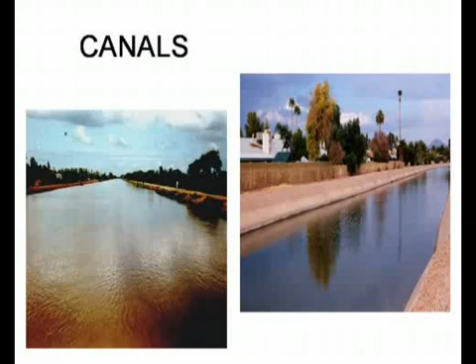The canals are nothing but man-made channels which carry the water which is diverted from the natural rivers. It means we use river water and transfer this water to other areas where there is no natural flow of water. Before diverting this water from rivers, we need to store this water, and this water is stored in the form of dams, weirs, barrages, and they are called diversion structures.

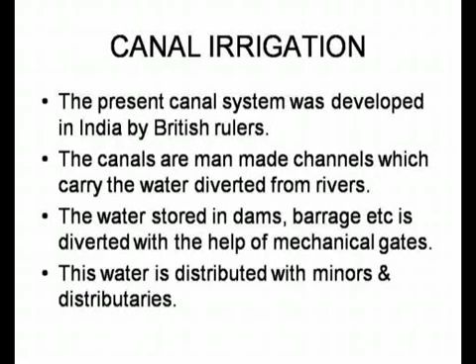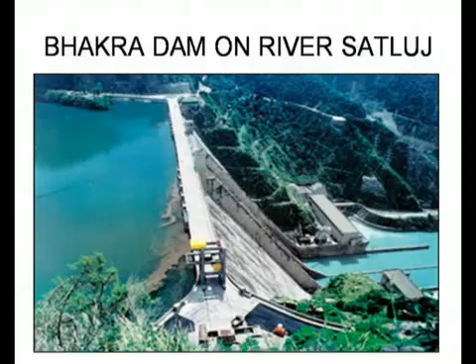And there are mechanical gates which can regulate the flow of water in the canal. They can increase or decrease the flow of water depending on requirement, depending on season, depending on cropping pattern. The water is further distributed from a canal by minors and distributaries, and the control of this water is with the local government, which decides how much water is to be distributed to which area. Therefore, canal water is a centralized form of irrigation which is controlled by government.

The canal water has certain advantages. The first advantage is quality of water. The water in canals is coming from rivers, and rivers take their water from the melting ice in Himalayan areas, or they take water from the catchment area or from big lakes, etc. And the water is sweet water, non-polluted water, and best for agriculture or human consumption.

The canals have transformed the agriculture economy of northern India, western India, and other parts where canals were built by the British and later on by government. We all know that the Indira Gandhi Canal, which is passing through Rajasthan, has transformed the life of people of Rajasthan, and it is the lifeline of millions of people living there.

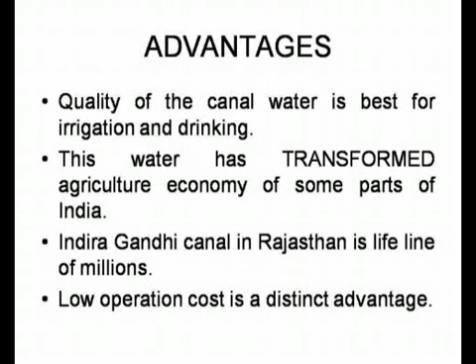The low cost of operation is the distinct advantage of the canal system in India, because water flows by gravity and it does not require any form of energy for distribution of water. The diversion structures like dams can be used for generating electricity. They produce clean power without any pollution.

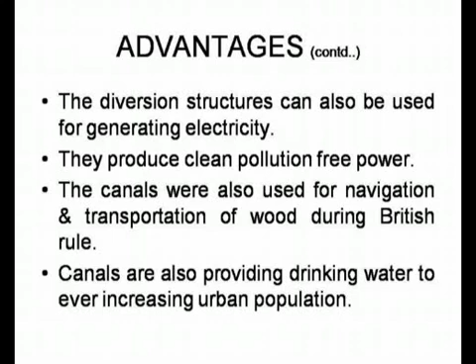The canals were also used for transportation of wood and navigation during the British period, but slowly after development of the road sector, this was not popularized and slowly stopped. The canals are also providing drinking water to the cities and urban population nowadays.

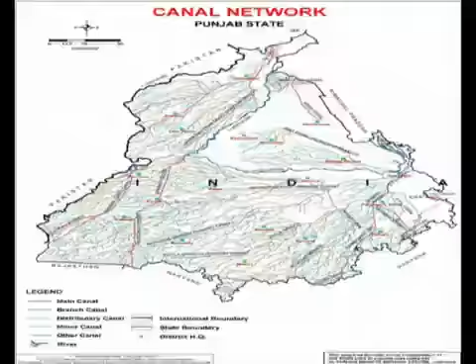Canal irrigation was very popular at some point of time, but it is declining due to various reasons, and we will discuss the problems with canal irrigation. The construction of diversion structures and canals requires a huge amount of land, and it causes ecological and social concerns. Because of land, a lot of persons are displaced at the time of construction of dams or weirs or barrages, and their resettlement is a very big problem.

Huge investment is required initially, and the income is generated in years to come. The dams constructed in earthquake prone zones like the Himalayan area put a question on their safety, because safety is a big concern during an earthquake or any other natural calamity. The Himalayan region is a very sensitive area for earthquakes; it is in zone 5 as far as earthquakes are concerned. So their safety is a concern for government and the people living downstream.

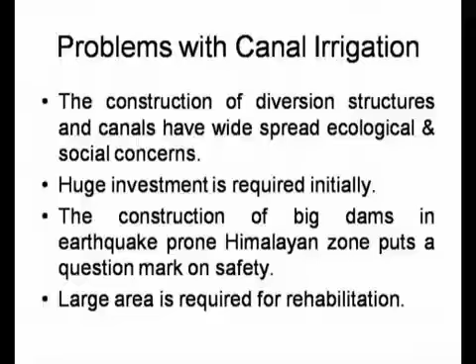Another area which is very important is land required for rehabilitation. When we construct big dams or other hydroelectric projects or water retaining projects, we displace a lot of people, and they have to be rehabilitated, and for that purpose we require more and more land.

Now, whenever there is excess rain in the catchment of rivers, there is a danger of flood, and the life of the people living downstream of the river is always in danger. Due to a lot of siltation in beds of rivers and also reduction in life of the reservoirs, flash floods are caused even with small rains, and this problem is increasing day by day.

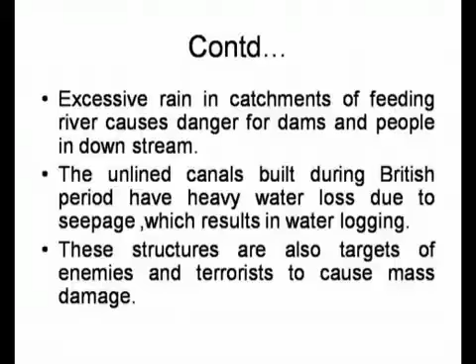The canals built during the British period were unlined canals, and they are causing a lot of seepage of water in the areas adjacent to the canals, and a lot of water is wasted through these unlined canals, which is causing waterlogging. Structures like dams are always a target of enemies, so that they can cause mass destruction, and now they are targets of terrorists. So we have to incur a lot of expenses for security of these structures.

Canals are also reducing the quantity of water in the natural flowing rivers, thereby reducing the speed of the water flowing in the river, and the siltation increases, the depth of the river decreases, and the pollution increases. The effluents are not diluted due to less quantity of water, and aquatic life is also disturbed.

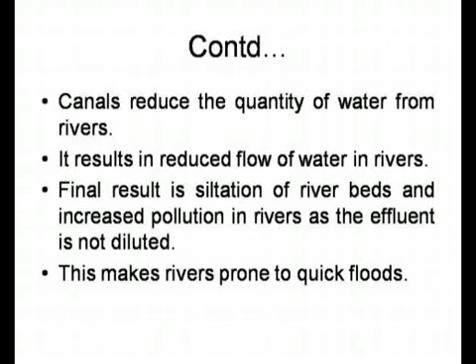The less depth of the rivers makes it prone to floods. Now we have to look forward. What should be our strategy in case of canals?

Despite several disadvantages which we have discussed earlier, there is no substitute at present for canals in the areas where groundwater is not available or groundwater is not fit for agriculture or human consumption. Like Rajasthan, like some parts of Haryana, we have to use canal water, and there is no alternative. So we have to make some strategy for proper use of canal water.

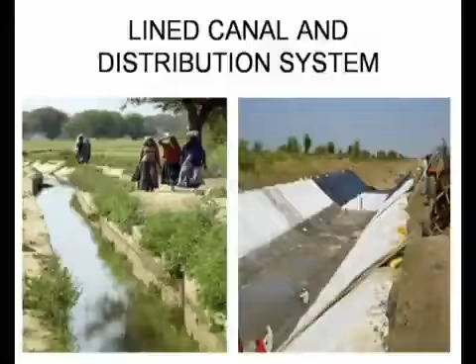First thing is maintenance of these diversion structures and canals has to be taken on war footing. The seepage from these areas, the leakage from the canals, all other problems have to be addressed by proper maintenance of these structures. Another thing is lining of the canal. Wherever canals are there, they have been constructed during the British period. Now we have to at least provide lining to them so that there is no loss of water from the unlined canal.

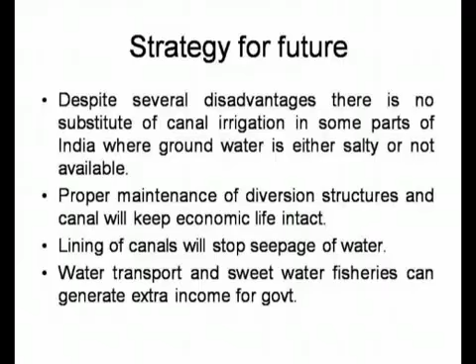For making the canals economically viable, we can develop water transport and we can develop sweet water fisheries in the canals so that we can get more revenue out of the canals, and this can be used for maintenance of canals and the reservoirs.

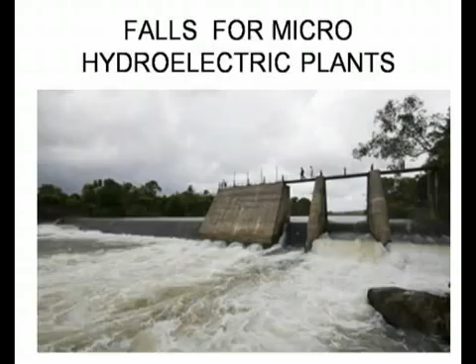The falls are available at various places, and these falls can be used for establishing micro hydroelectric plants, and these micro hydel plants can supply electricity to the nearby villages on a standalone basis, or it can be used for other purposes like industry or any other thing.

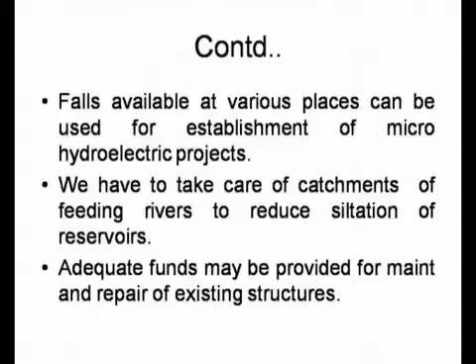The catchment area which is feeding water to the river will have to be treated by vegetation so that silt is not released in the water, reducing the economic life of the reservoir which is feeding the canals and reducing the life of the reservoirs.

This is very essential, and this has to be taken on war footing because the life of most of our dams is reduced to half due to heavy siltation, including our Bhakra Nangal Dam, which is the largest in India, but it is also affected by siltation. We require a lot of funds for maintenance and repair of existing structures, and these funds have to be provided for sustaining the canals which have already been constructed.

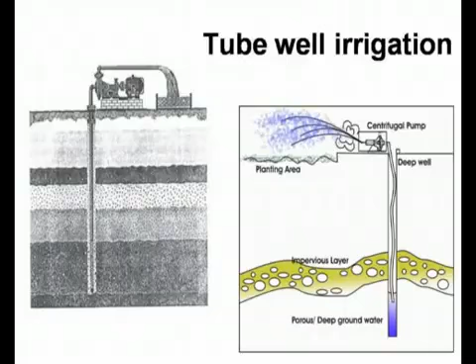After canals, there was a boom in the irrigation sector, and this boom was caused by tube well irrigation. In the mid-70s, tube well irrigation was popularized in India after the Green Revolution. Before this Green Revolution and tube well irrigation, the main method of extracting groundwater was through wells only, and there was no other method.

Tube well irrigation means extracting water from the ground through mechanical means. We extract the water from the ground by employing pumps, and by employing pumps we get a lot of water quickly and with low investment cost. Before development of tube wells, groundwater was extracted through traditional ways, which were rahats or dhikli or other things, which were either driven by animals or using manpower.

Another thing about tube well irrigation is that it has revolutionized the entire irrigation sector because it has decentralized the ownership of irrigation structures. The canals were in the control of the government and bureaucrats, and supply of water was at their will. But now the owner of the irrigation structure is the farmer himself, and he can control the water when he requires, how much he requires, and in what form he requires. That is the biggest achievement of the tube well irrigation system.

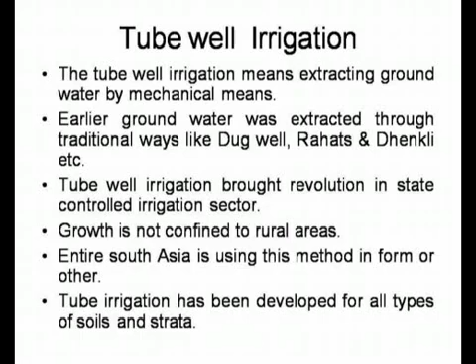And growth of this system is not confined to India. Entire South Asia is using this form of irrigation for development. The technology has been developed for every type of soil and every type of strata. Even hard rocks can be bored through mechanical rigs for construction of wells.

So this type of irrigation is being developed everywhere in India, and it accounts for over 60% of the irrigated areas. Means 60% of area is being irrigated through this tube well system. But remote sensing data shows that it is actually 75%. It means our data in physical form is not complete. The actual irrigation through the tube well system is more than 75%.

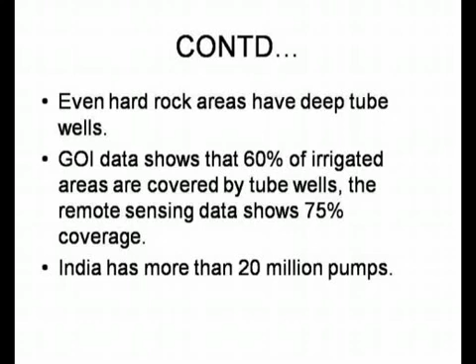And at present we have 20 million pumps. 20 million pumps require a lot of energy and a lot of maintenance. So a lot of manpower is also involved in this tube well irrigation sector.

Now we will discuss the benefits of the tube well system to farmers. The first benefit is low investment and low gestation period. The investment on a tube well is very low. It may range from 20,000 to 1 lakh, or in case of deep bore wells it may be a few lakhs. But we start getting water immediately. There is no gestation period. Immediately after boring of the tube well and installation of a pump set, we get water.

The asset is controlled by the farmer or owner at his own will. There is no interference from anybody. The irrigation is highly efficient. There is very less loss of water due to evaporation, as the transportation length is very low.

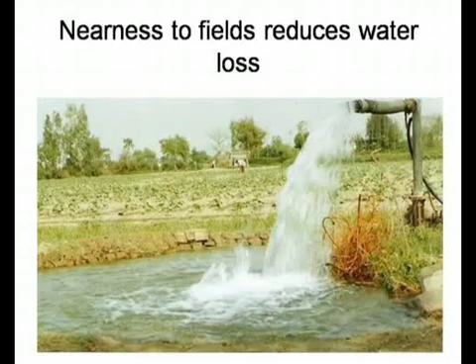The tube wells are situated near to the farms, and there is drought proofing for at least 1 or 2 monsoon seasons, because we require recharge of groundwater through the monsoon. So it has to be there, but at least for 1 or 2 seasons we can survive with the tube wells. Technology for drilling tube wells is very easy and available. Also the finance is easily available. So this is contributing towards development of the tube well sector very fast.

Next, it is the priority of successive governments. The development of tube well irrigation is the priority of all governments. Whatever government comes in, central or state, every government is giving benefits to the farmers who are using tube well irrigation. Banks are also financing these schemes individually and on a local area basis. Earlier, subsidies were also available for boring tube wells and allied activities.

Now it is not only beneficial to the individual farmers. Tube well irrigation is beneficial to the nation. Tube well irrigation has created much more potential and much more irrigated area as compared to what has been created in 150 years by the government. The British rulers created canals, and up to the 1970s some canals were also built by the Government of India. But the total irrigation created by these canals cannot match the potential created by tube wells in 25 to 30 years. And the expenditure involved on canals and storage structures was very high, and it involves public funds.

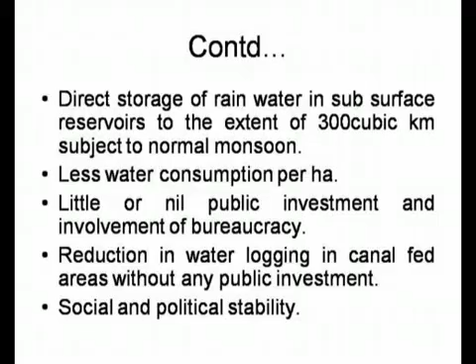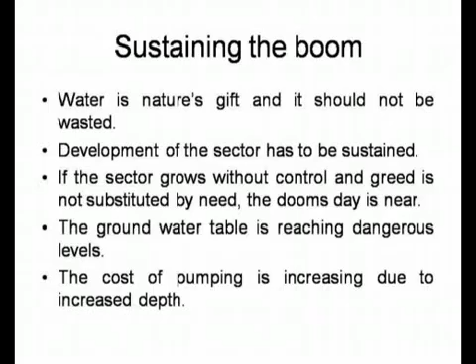At every forum we are discussing the groundwater table, the depletion in the groundwater table, coming of salts along with water, and other harms of the boom in the tube well irrigation sector. The water table is reaching dangerous levels in some parts of India. Western parts of India like Punjab, Haryana and western Uttar Pradesh have already suffered, and in southern India, in Andhra Pradesh, Tamil Nadu and Maharashtra, this problem is increasing day by day.

Only the areas where tube well irrigation has not been developed are not suffering from this problem, like the eastern part of India. Due to the decrease in the groundwater table, we have to increase the depth of the tube wells, and the cost of bringing water up to the farm is increasing due to the increased depth of the tube wells. This requires more fuel, more energy, and efforts are wasted due to this.

Pump sets which were earlier purchased by farmers have become redundant due to more horsepower needed now. So this problem is increasing day by day. Cost of fuel is also increasing. Fossil fuels like diesel are used for running tube wells, electricity is used for running tube wells, and the cost of these two items is increasing every day.

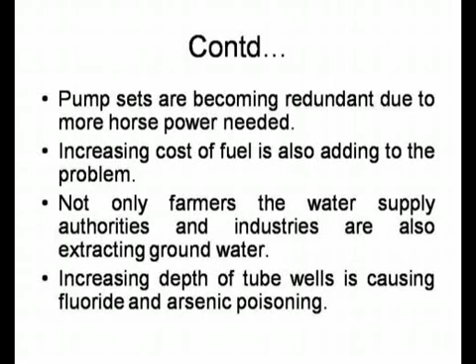The farmers are not the only persons who are extracting groundwater. The industrialists, the urban water supply agencies, the government agencies, they are also drawing groundwater for their need. And they are also equally responsible for depletion of the groundwater table.

The increasing depth of the tube well is not only causing these problems, but it is causing fluoride and arsenic poisoning also. In some parts of India, the water is now not fit for use because of the increased depth of the bore wells. Pollutants used by people in industry or in farming are entering groundwater and making water unfit for human consumption.

The sector is still uncontrolled, and whichever controls are there, they are not effective. So the sector has to be controlled and some legislation is necessary for controlling the uncontrolled growth of this sector, and we have to sustain this boom of irrigation in the form of tube well irrigation.

Now we will discuss other methods to reverse the trend. The method to reverse this trend should be low cost and it should be an indigenous method so that it can be popularized in every part of India without much expenditure. So for a solution, we have to only look back. For a solution, we do not require very high technology. Only we have to combine the technology with traditional methods.

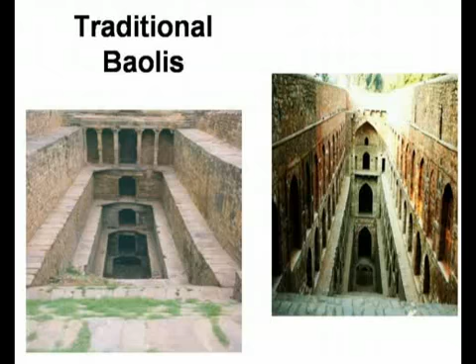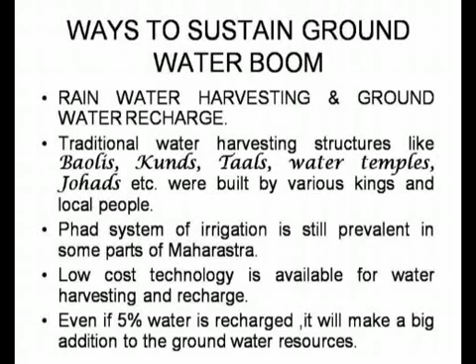Traditional knowledge is there and we can see structures like Baolis, Kunds, Tal, Water Temple, Johads in various parts of India which were built by kings at that time and local people. These structures were used for conserving groundwater and recharging the groundwater. The Phad system of irrigation is still prevalent in some parts of Maharashtra, which is based on conserving this groundwater. Low cost technology is available in India traditionally for harvesting groundwater and recharging the groundwater.

The other method available with us is increasing irrigation efficiency. Increasing irrigation efficiency means irrigating more fields with the same amount of water. It means cutting the water use in some form to deal with the problem. And micro irrigation is one of the methods which can solve this problem. The only problem with micro irrigation is that it is capital intensive.

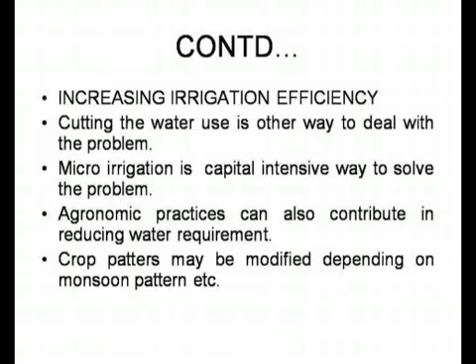Another thing is we can use agronomic practices which can contribute to reducing water requirement. The crop patterns can be modified depending on the pattern of monsoon and depending on each area. The other way to reduce the pollution of groundwater is organic farming. Organic farming can deal with contamination and pollution of the groundwater. And we will deal with organic farming in another session in detail.

The other holistic way of dealing with this problem is the watershed approach. The watershed approach is a holistic approach to conserve all the components of nature, be it rainwater, be it soil or forest. And it involves the community in most of its components.

Various studies done by various organizations have shown that a water table rise was noticed and productivity was increased wherever the watershed approach was followed, and conservation of soil and forest were also an integrated part of the watershed approach. Government funds are also available for the implementation of the watershed approach, and this will be discussed in detail in another module in this course.

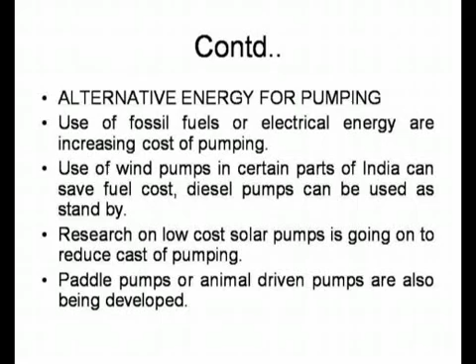Another thing is energy. Energy is required for tube wells, and we presently use fossil fuels or electrical energy, but the cost is increasing. In order to sustain the boom of groundwater, we have to reduce this cost. Research is going on for the use of wind pumps, pedal pumps or other types of energy sources for reducing the cost of extracting groundwater. Solar pumps are also available, but their initial cost is very high.

Animal-driven alternatives are being developed, and there is a lot of need for R&D in this sector. Considering all these things, we still feel that rainwater harvesting and groundwater recharge are the best low-cost alternatives which will sustain the boom of this tube well irrigation.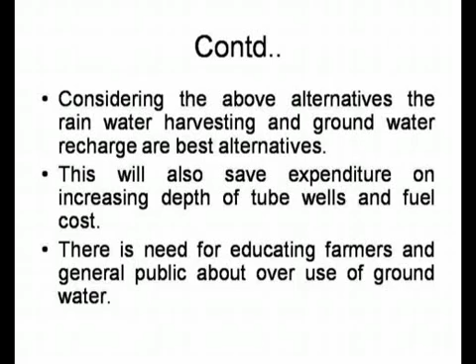The expenditure will also be curtailed. The saving will be there in form of reduced depth of tube wells and reduced fuel cost. Though there is need for educating farmers and general public about use of groundwater so that they should not waste it. Now we will discuss about another form of irrigation, that is tank irrigation.

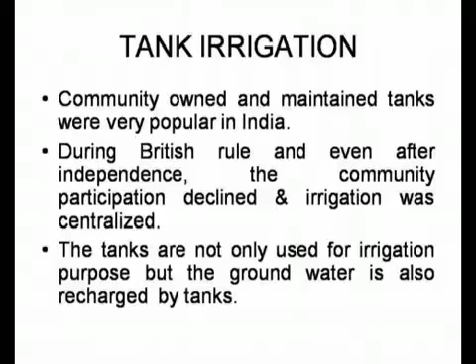Tank irrigation was very popular before Britishers came to India, and community-based tanks were constructed especially in South India, and they were used for irrigation and other purposes. During British period, the community participation declined and irrigation was centralized and canals and other things were made.

The tanks are not only useful for irrigation, but they recharge the groundwater indirectly. So there is urgent need for rehabilitation of these tanks, especially in South India and in all other parts of India, with participation of the community, so that we can get benefit from tank irrigation and also use it as a structure for recharge of the groundwater.

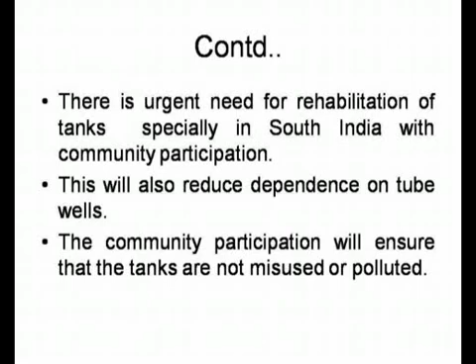The development of this sector will also reduce our dependence on tube well irrigation. Ultimately, it will reduce the consumption of energy. Community participation will ensure that the tanks are not misused or polluted by human activities like washing clothes or other activities near the tanks.

The most important and future of irrigation is micro irrigation, and we will discuss about micro irrigation now. Micro irrigation methods involve very high initial cost, but they save the precious water and pay back in form of saved water, saved power and increased productivity. So we have to popularize micro irrigation at any cost.

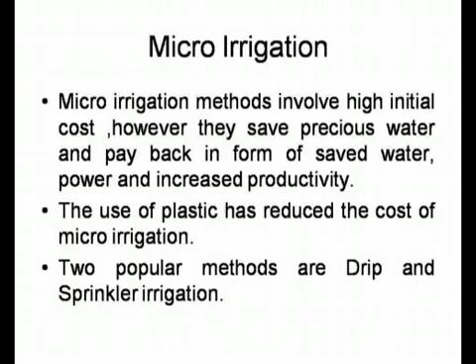Earlier metals were used in manufacturing these implements, but now use of plastic has reduced the initial cost of the micro irrigation products. The two popular methods are drip and sprinkler irrigation. We will discuss about drip irrigation now. The main aim of drip irrigation is to supply water directly to the root of the plant. It means there is no wastage of water in between and water is directly going to the root system.

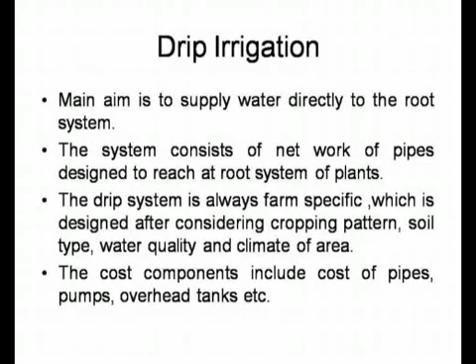The system consists of a network of pipes and it is designed to reach the root system of each and every plant. It means that the system is not universal and it has to be based on the requirement of the particular field, and it is a farm-specific system. It means it has to be designed for each and every farm.

The aspects which are considered at the time of designing drip irrigation are cropping pattern, the type of soil, the water quality available and climate of the area. It means what will be the evaporation loss and what will be the average rain, so that we can calculate the requirement of water by drip irrigation. The cost components are cost of pipes, cost of pumps and cost of overhead tank for storing water.

Drip irrigation saves a lot of labor. It saves most of the water wasted due to evaporation and transportation, and it also reduces the fertilizer cost. It prevents waterlogging in the fields. It is very useful in the case of growing vegetables and fruit crops because the water is supplied directly to the root system. The productivity increases to the extent of 30 to 75% in case of such crops.